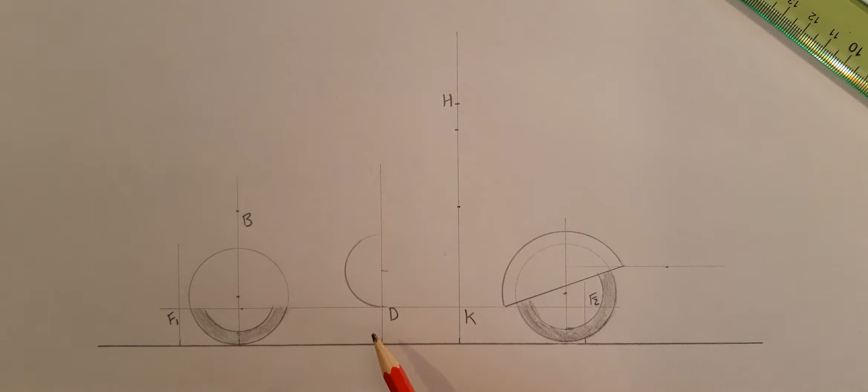Hi folks, so this is a 2015 question 6, and in this question I've set up a bit of it. It's based on a moped. What have we got? We've got a few points of interest to us. We've got the focal points and we've got a point B, okay, which is the point on the ellipse itself.

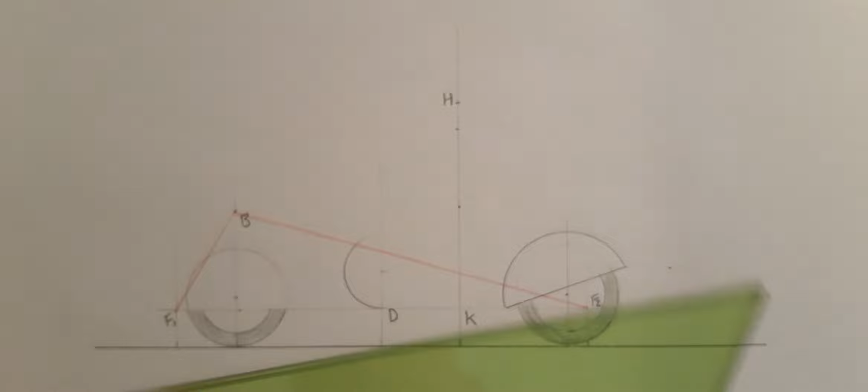Now, I don't have the major and I don't have the minor, but I know that if I join both focal points to a point on the curve, that would be equal to the major axis. And the way they like to see that usually drawn out for a solution is like so. Just extend on that line there. Get your compass. Put it on B, stretch to F1 there. And we'll just swing that up, okay?

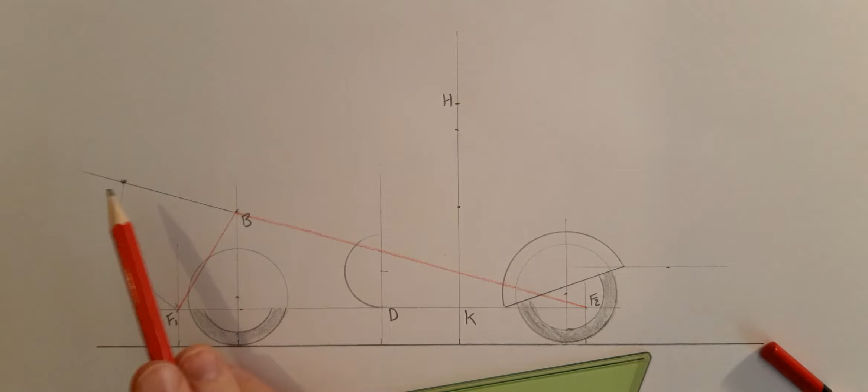So now, from this point here to that point there, that is the major axis. So we're going to bisect that, of course, because we need half the major axis. I'll just swing 2 light arcs there. And that is half the major axis there. So I'll just set my compass to that now.

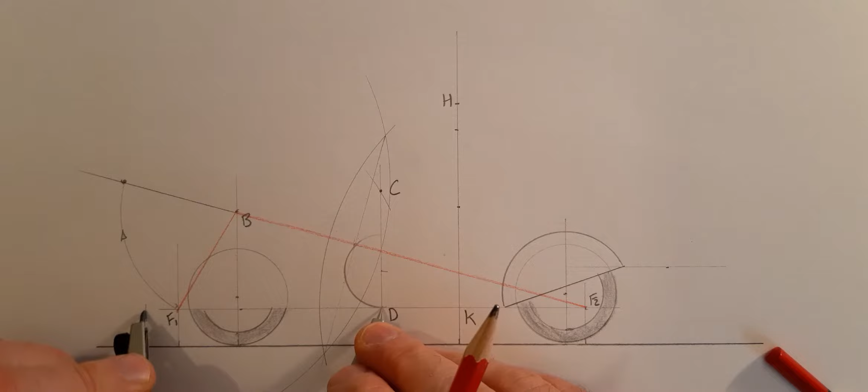And I'm going to get use out of that because I know that half the major axis is the same distance from any of the focal points to the top or bottom of the minor axis, okay? So by swinging that there, half the major axis, that is finding me point C, as they call it in the drawing there. Now, I'll also finish out, get this guy here, which I'm going to need this end. So we have a quarter of an ellipse to draw now. We've actually got 3 points on it now, 1, 2, and 3.

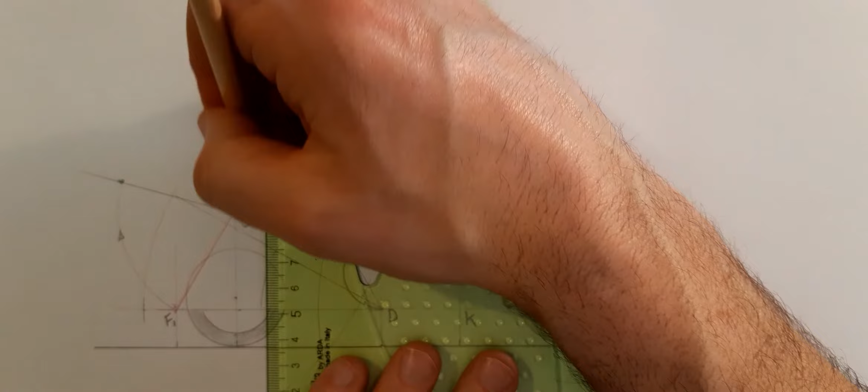So I'm going to draw a quarter of my major and minor circle next. And now we'll divide that up with our 60-30. Where it hits the major, we'll come down. Where it hits the minor, we'll come out. Now, if you ever get a question where the ellipse is standing upright, just turn your page and turn it back when you have it drawn, okay? So there now is five points.

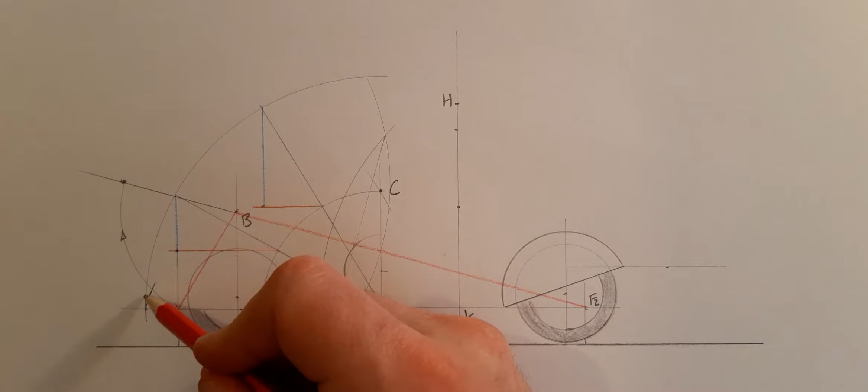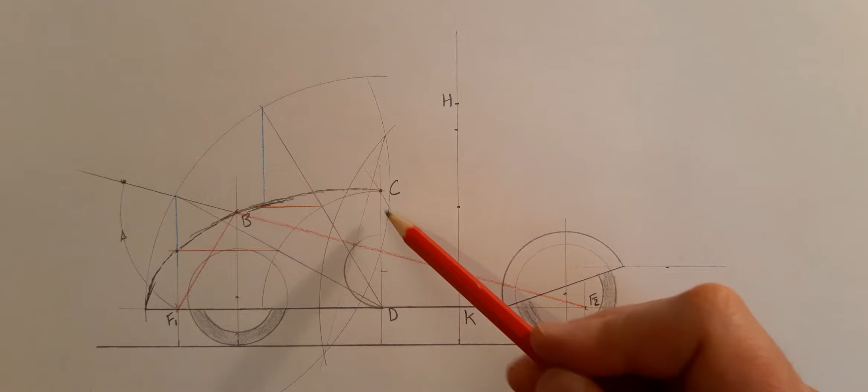So we'll start off there. And that's a quarter of our ellipse drawn. You can do this heavy line in here as well. Next thing there, we need to work on this here. So we have part of a circle here, okay? Now there's a tangent to go on there. We need to find point G. So how do you do that?

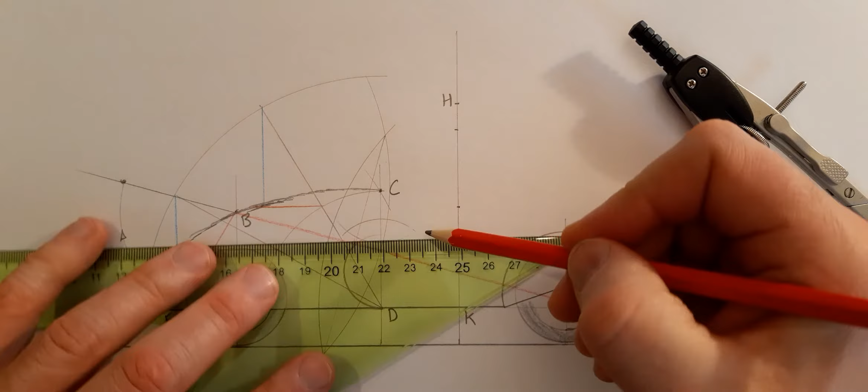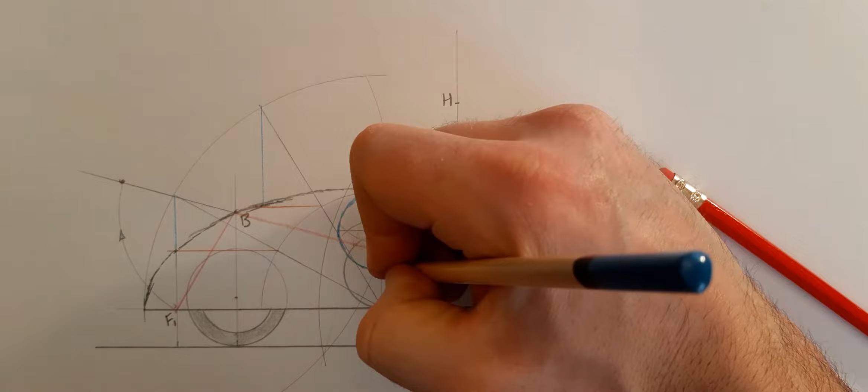Now I know it's 25 of a distance, but they'll want to see you showing your knowledge. So we'll swing an arc from there and there. So I'm just bisecting the distance between here and C. And when we bisect that now, we'll get a place to put down our compass. And draw in this semicircle. Now I'll go over that semicircle in blue just to highlight so it'll be easier for you to see. But that's a semicircle there. Where it cuts here, exactly here, we'll find you point G.

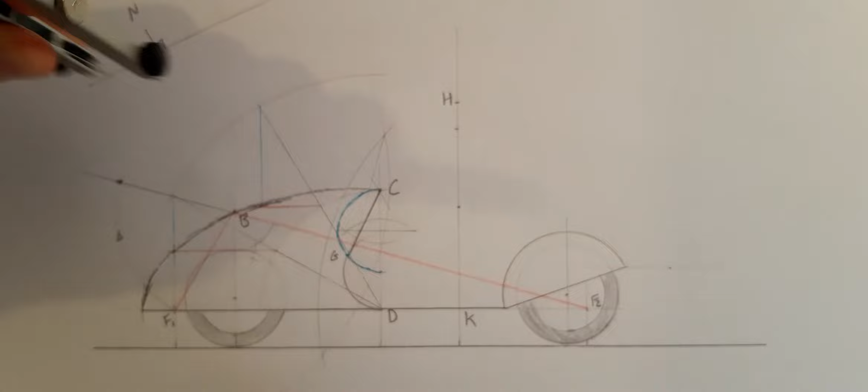Put on your set square now. That's our tangent now. We're almost finished there with this side of the drawing. Last thing to do there is they're telling you the line BE is a normal. So usually, say you had a tangent to something like that. What is a normal? A normal is a line at 90 degrees to a tangent at the point of contact on an object, in this case an ellipse, okay? So we're going to bisect this angle here. That's going to give me my normal there.

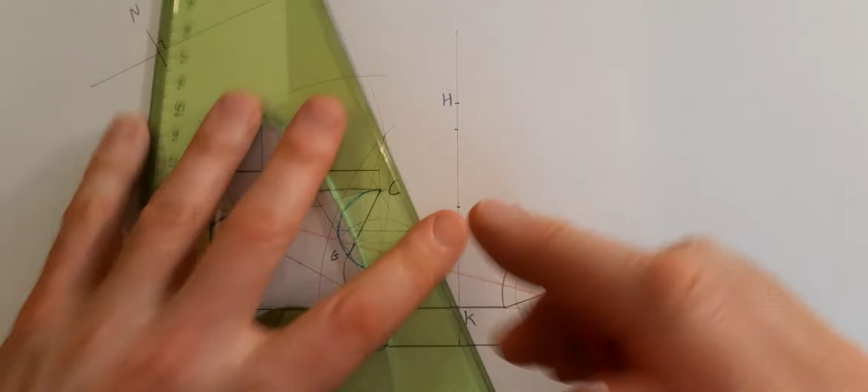Now I know E is 15 higher than B. So if I put in a line there now, that will find me E up here. I can just put in that guy heavy there. This heavy here. And we can sketch that or shade that in grey there now. Now that's the left hand side of that moped finished with.

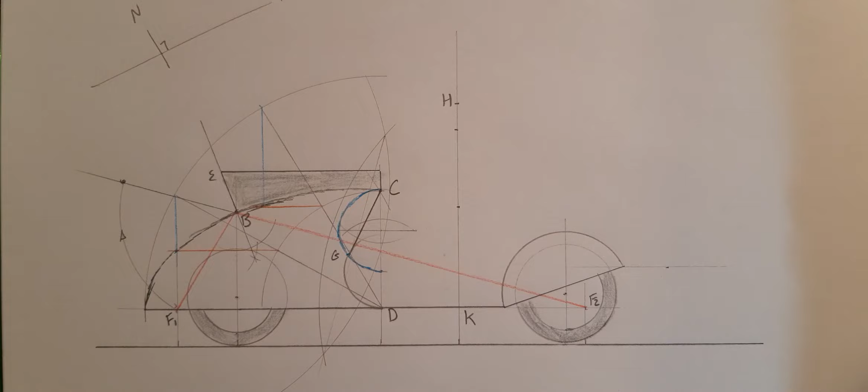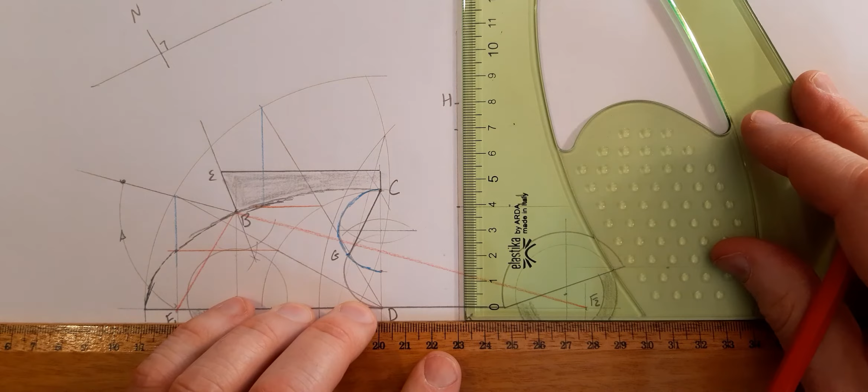The next thing there is we have to draw a parabola, and actually I'll just put in point J there. J was 20 out from the middle there. Now, we're quite lucky this time, because this parabola will divide in evenly, nicely. The number 4 will divide into it. So 4 into 40 goes 10 times. You can mark them off. And 4 into 20 will go in 5 times. Okay.

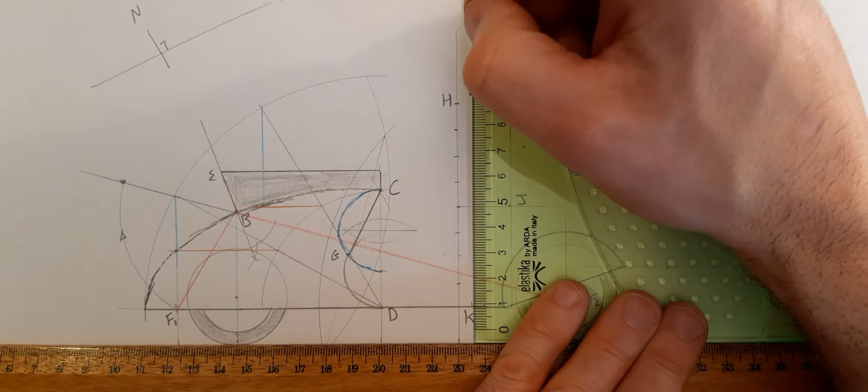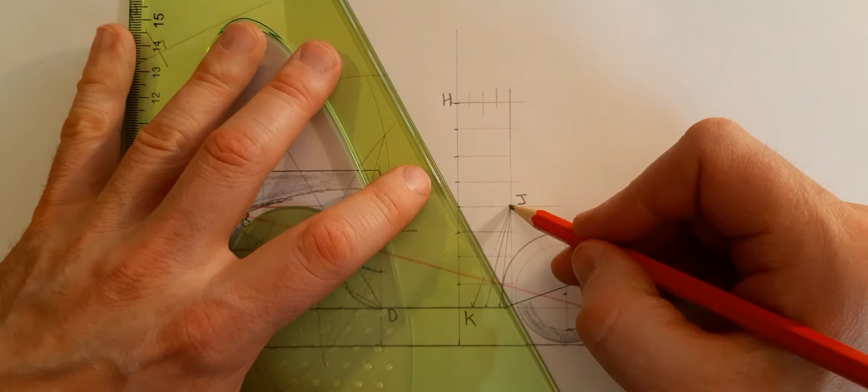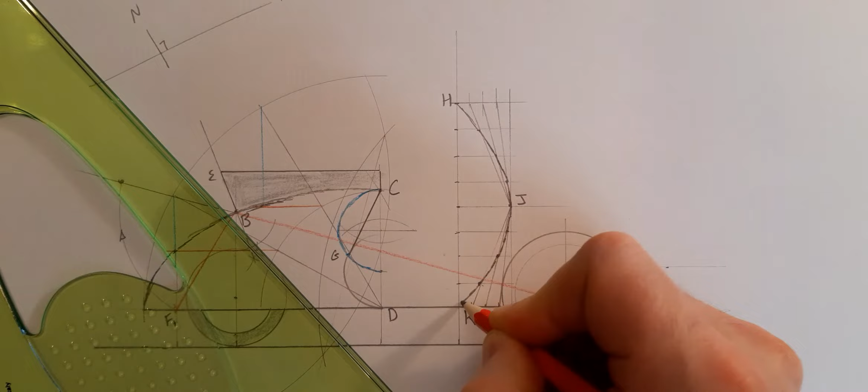Now these lines will all come up like this. Again, if you're ever unsure, just turn your page around and turn it back when you're finished your parabola. Now, those will get us all our points there that we need to draw in our freehand parabola. And that is that part of the moped.

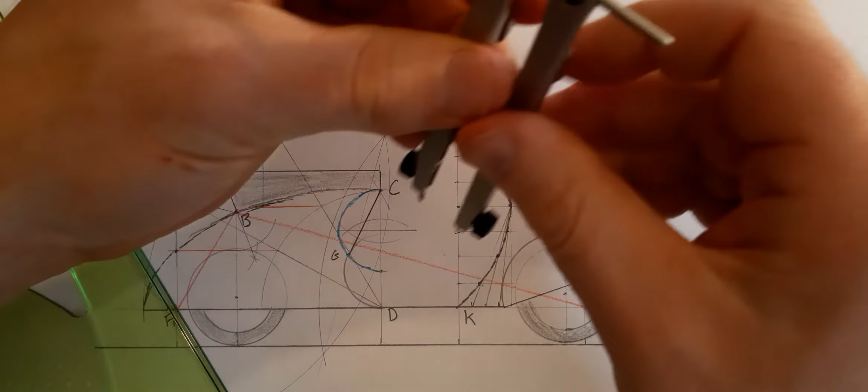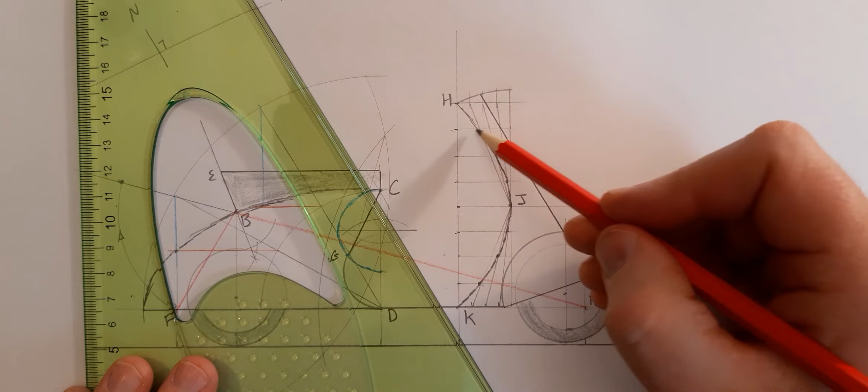Next thing there, there's a bit of an arc going on here. Now we know the radius is J to H, so let's set our compass to that. And we can swing that arc there. Okay, and we need to put in this bit of a slope here going in. I can put in that line there. Now, we're told also the headlight on the moped comes down 10 mil from H. I already have that line drawn in from earlier on from my construction work with the parabola. So I can just drop that there and put that in there.

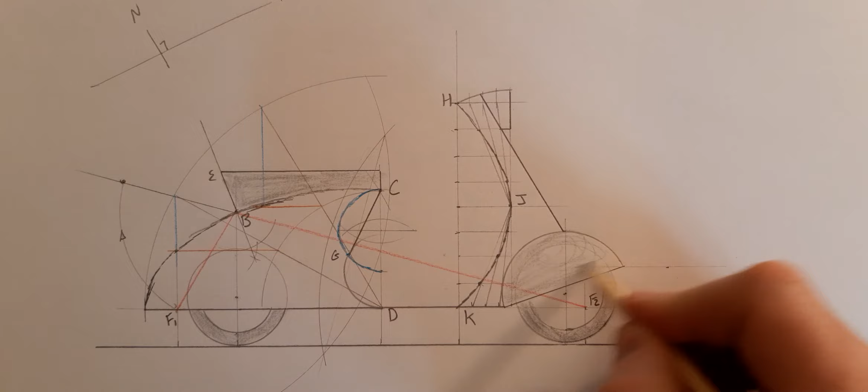Okay, and in the question, you don't have to shade this. I'm just going to shade it in to keep it like the question there for visualization. But that is it finished, folks. So the hardest thing there was probably figuring out the major, or drawing the ellipse, okay?

So we had a point. So remember, if you have a point on the curve and both focal points, well then if you add these two guys up, that will get you the distance of the major axis. And once you know the major axis, it's easy to find half the major, and half the major from a focal point, swinging an arc, will find you the top of the minor axis, and then it's easy enough to draw it after that.